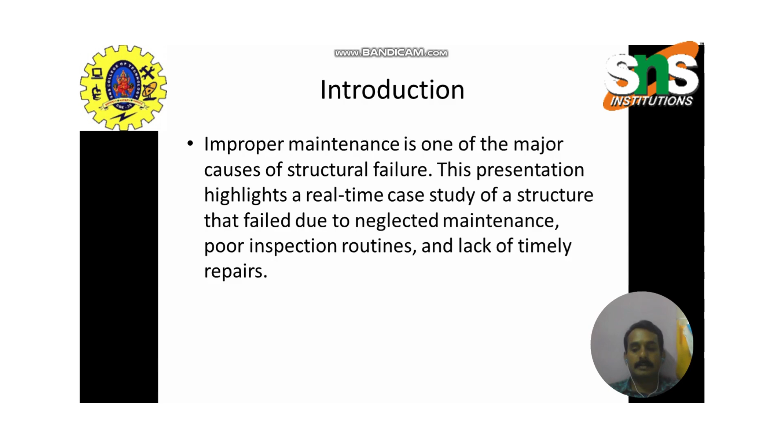The case study involves the study of the Gokhale bridge collapse in Mumbai during the year 2018. The bridge is located at Andheri in Mumbai. The structure is a pedestrian and road over bridge. The incident occurred on July 3rd, 2018, and the nature of failure is partial collapse of a walkway slab due to corroded steel and neglected repair.

So, this is an alarming situation where the structure collapsed due to corroded steel. Corroded steel may be due to various environmental factors since this area is exposed to a marine environment. There may be corrosion existing in the steel due to chloride and sulfate attack, which may be the major reason for failure of the slab.

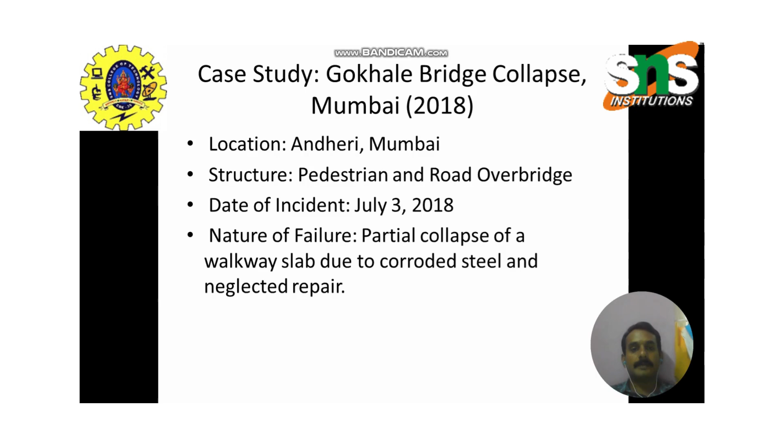The causes of failure involve the major reasons listed below. Severe corrosion of the steel reinforcement of the slab. Next is deterioration of concrete due to water seepage. Since there may be micro cracks in the concrete surface, the water seeps into the concrete and reaches the reinforcement, thereby leading to corrosion of the reinforcement.

This may be due to improper inspection strategies and poor quality checks during the process of construction and also delayed repair works. So, if we point out any cracks in the building, they should be taken up for immediate repair. Otherwise, water seeping and propagating into the cracks may lead to reinforcement corrosion.

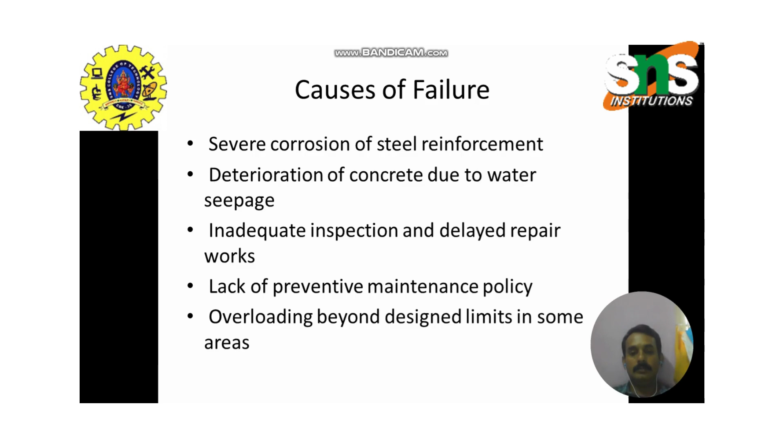Before failure, there were several warning signs which were ignored. That is, visible cracks and rust stains observed at the outer surface of the structure. Complaints by commuters about vibrations and loosened slabs were frequent, and the authorities ignored the warnings issued by the commuters. Instead of structural strengthening, only minor repair works were carried out on this structure, which may also be a major reason for failure of the structure.

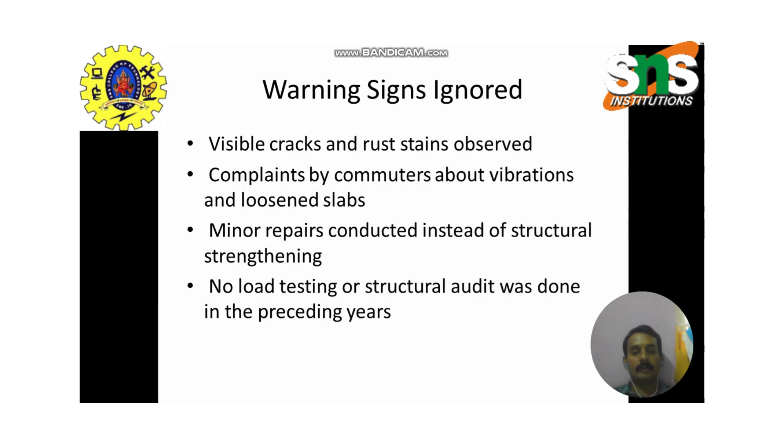Another point is there was no load testing or structural audit done in the preceding years. The withstanding capacity of the structure was not ascertained by conducting load tests. The lesson learned from this case study is that regular structural audits should be incorporated in order to find out the major reasons for failure and also to improve the structure, thereby preventing collapse, failure or structural damage.

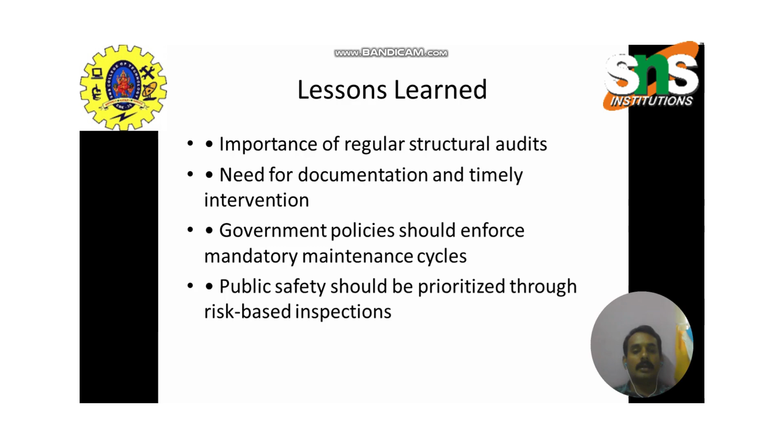Next, the need for documentation and timely intervention in the form of quality checks and quality audits. It also emphasizes the fact that various government policies should be enforced mandatorily in order to maintain the structure, thereby preventing future damage. Public safety should be prioritized through risk-based inspections.

Among various recommendations, the following aspects should be incorporated. They are scheduled periodic inspections and maintenance. We should adopt digital monitoring systems such as sensors and IoT devices in order to ascertain the rate of corrosion and the presence of micro cracks, shrinkage, etc., so that the building can be protected from inherent damage.

The construction team should be trained to conduct various maintenance procedures in the event of early signs of distress in the building. We should allocate budget for preventive maintenance of any structure, which may prevent damage to the structure and various components of the building, and also ensures public safety. We should encourage public reporting of visible damage or distress at the earliest stage.

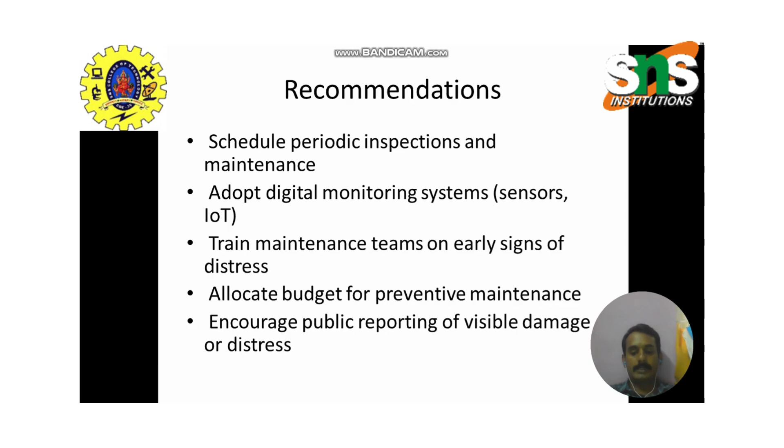The conclusion is we should not ignore or neglect structural maintenance, that is, routine maintenance, which may lead to catastrophic failures. It is essential to develop a culture of proactive inspection, quality audits, monitoring, and timely repairs to ensure public safety and infrastructure sustainability.